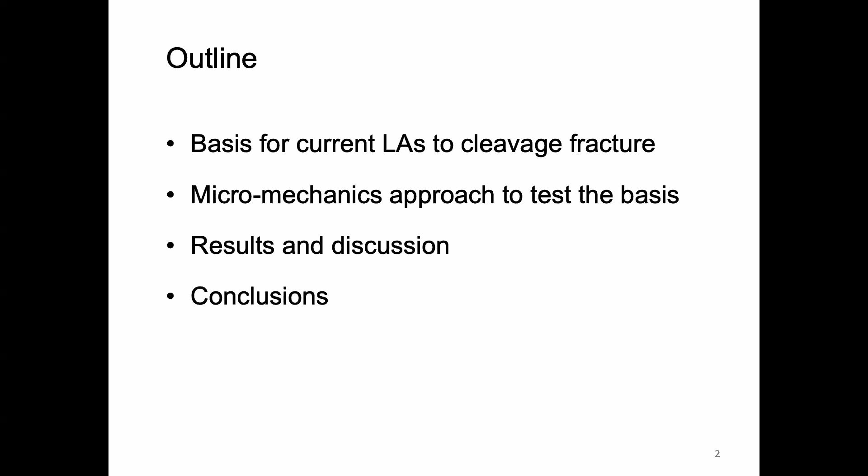The conventional local approaches for cleavage fracture start with the assumption that cleavage fracture is a Poisson process, which means three things. First, the probability of failure of an elementary volume is proportional to the volume.

Second, the probability of more than one failure in one elementary volume is close to zero, taken to be zero, which is the weakest link assumption. Third, the failure events in these disjoint volumes are statistically independent.

When you take these three assumptions of the Poisson process, you build all the local approaches to cleavage fracture.

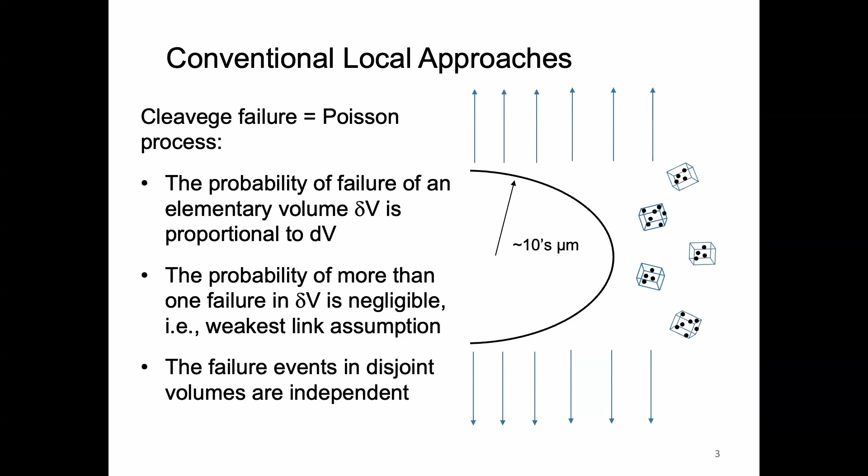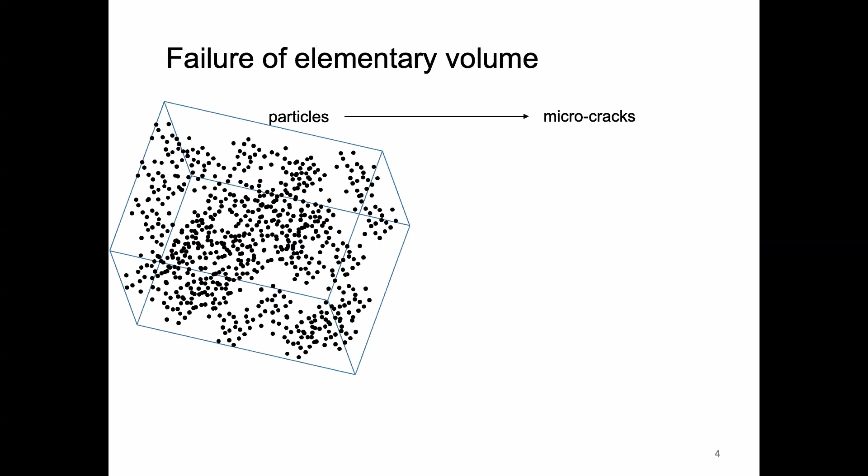From there, the logic continues like that. You have second phase particles, which are initiators for damage, and some of them, not all, form microcracks. Then the local approaches say the microcrack density curve is something we don't know.

We do know the density of particles that can be measured experimentally, but we don't know the microcrack density. Therefore, we assume it looks like a power law, and then the shape of that power law is calibrated with experiments.

But when you calibrate at one temperature and one constraint condition, and you want to move to another to predict probability of failure at another temperature, another constraint condition, or irradiated condition, you fail.

So essentially, this is the distribution of microcrack density, and there is a critical microcrack size. If there is a critical microcrack in your structure, then it can propagate.

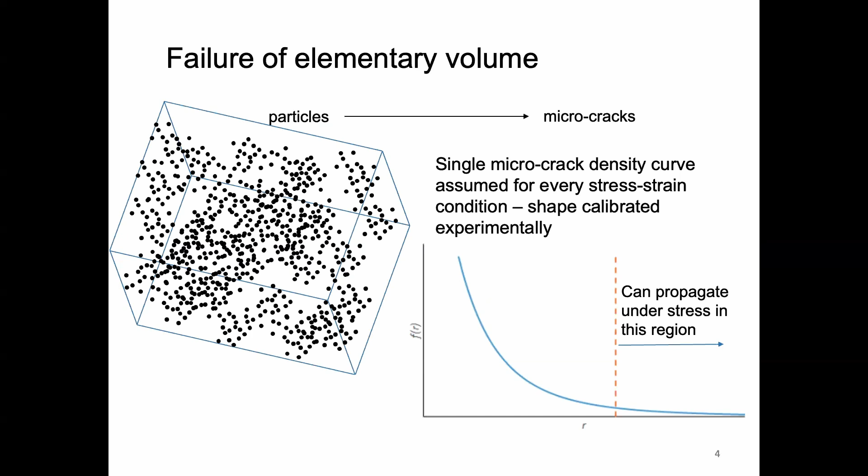That is the challenge, and it has been the challenge all along, although there have been a lot of trials to fix the problem. Eventually, when you calibrate at one temperature and constraint condition, you cannot, in most cases, provide accurate prediction at another temperature, constraint condition, or irradiation condition.

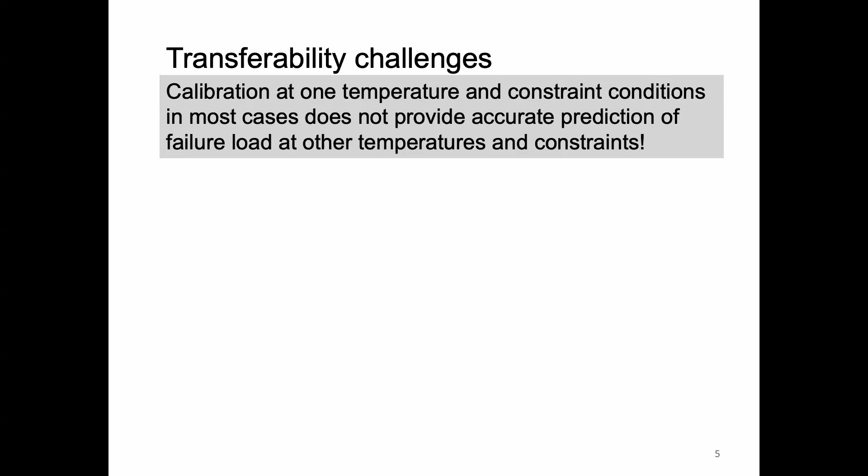In a way, if you know how the deformation properties change, you would like to be able to put it in the model and predict how the fracture toughness properties would change. But that's exactly what is not possible.

What we want to develop is a faithful model that accounts for the fact that the model capturing particle failure should be able to decide whether this failure leads to microcrack formation or void formation.

This is particularly relevant to the ductile to brittle transition regime. It should be able to somehow say what is the size of the defect resulting from this particle failure.

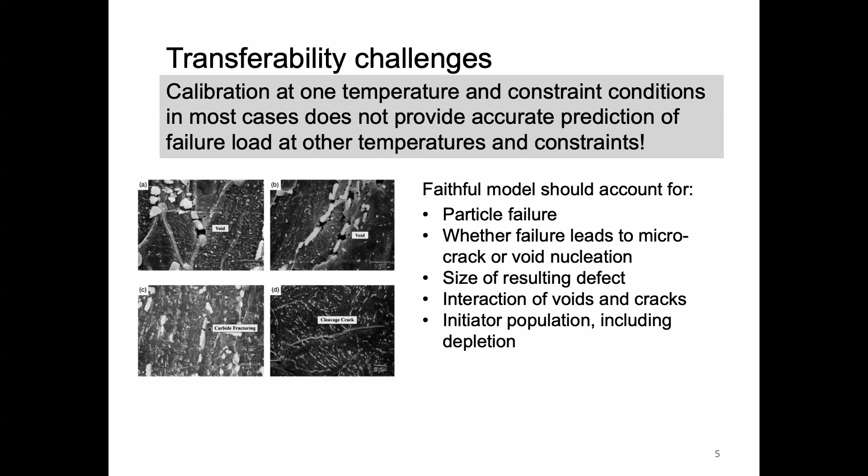It should be able to account for interaction of voids and cracks, and also for the population of initiators, which is a measurable property by metallography, including the fact that there may be depletion of these particles with the load. It should also say what is the critical microcrack size for propagation.

The problem we think exists with the existing local approaches is that all these different factors, although some are taken in different models, vary differently with stress strain conditions. That means in different locations ahead of the crack, different factors may have different contributions.

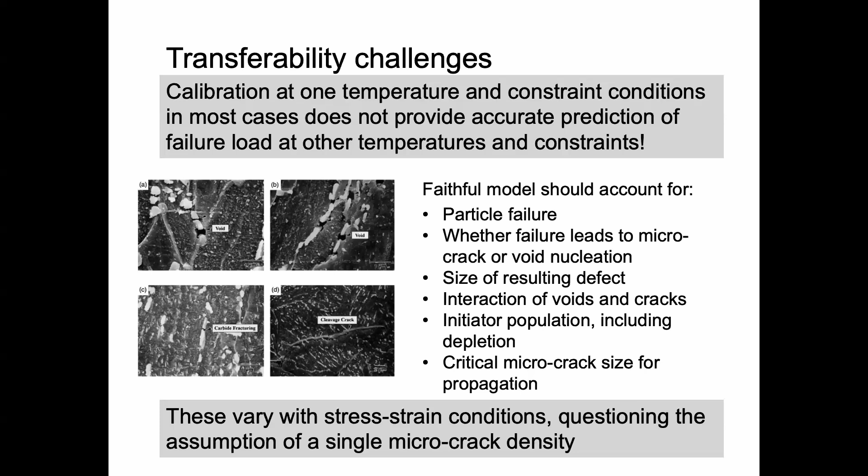That is questioning the assumption that we have a single microcrack density curve and the entire basis for, for example, the Beremin model.

So what Mike took to do was to create a micromechanics approach where he models the particle failure by deciding whether it's going to be decohesion, using a sort of Gurson model, or whether it's going to rupture and form a microcrack.

For that he uses a model that the three authors on the first page published in 2014, so it's been 10 years now. Then he wants to be able to follow the competition of ductile damage with cleavage.

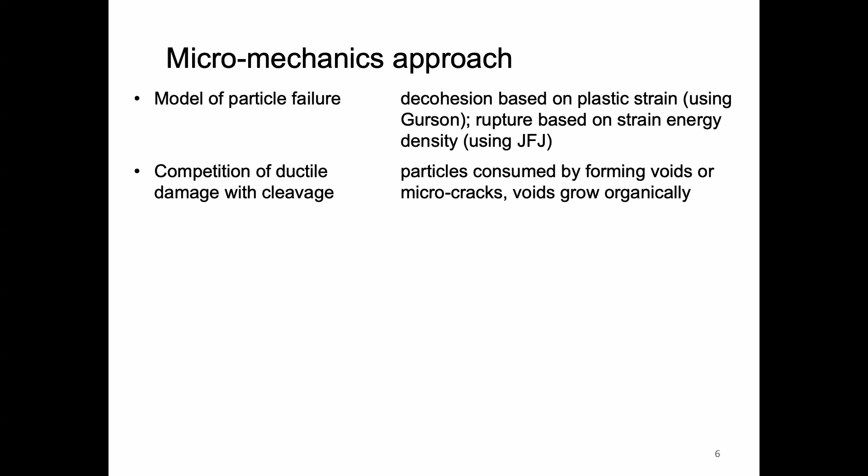So particles will be consumed by forming voids or microcracks. Also to predict mechanistically the defect size.

To account for interaction between local damage between the defects, so that load is distributed into the region surrounding the defects that form, and the coalescence of defects.

Eventually he wants to be able to consider macro crack effects, so he uses the model at each integration point separately, and then scales up to representative volumes.

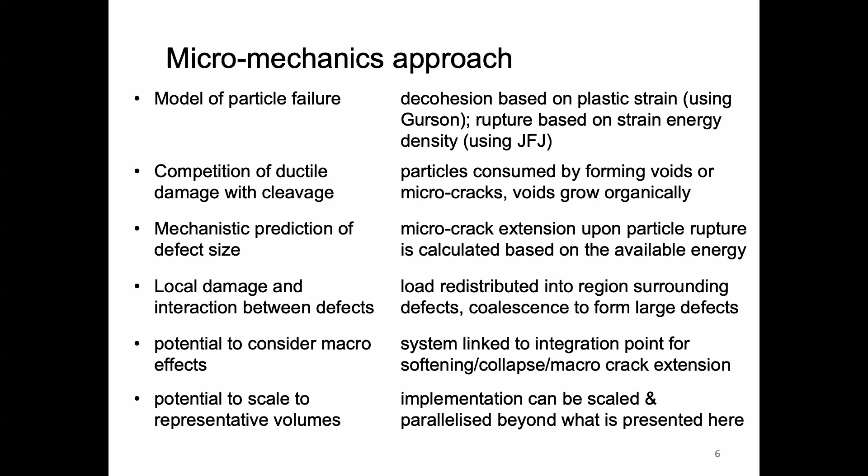I'm going to show only two simple things out of this, because it's a long story and you'll probably be able to read the details. But the load redistribution he handles in this way.

If you have a void that forms, the excess stress at the void end is redistributed linearly to a certain distance that depends on the void size—this is the horizon. If there is a defect within the horizon, that particle sees increasing load. And if there is another defect already formed in the horizon, there can be coalescence if the condition for coalescence is met. Here's an example of how it works.

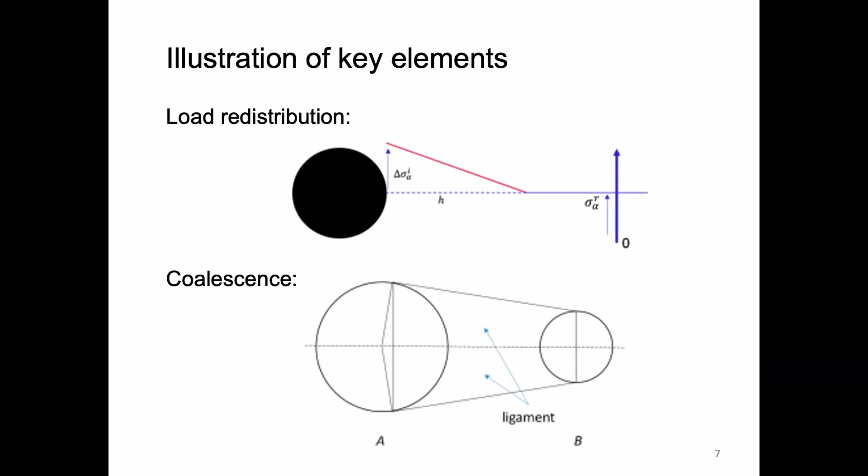This is one picture that is followed, at an integration point ahead of a crack in a 3-point bend specimen. This is the load here, the stress intensity factor that is increasing. These are the increments in the solution: number of voids, number of microcracks, aggregate voids formed by coalescence, aggregate microcracks, and so forth. The simulation starts with a random distribution of particles.

We have 10,000 particles initially. A very small number of those are already voids, because you can see that in the real material too, so there's a certain number of voids initially. These 10,000 particles are distributed along grain boundaries, triple lines, and inside the grains. What you see here is only the ones distributed on grain boundaries and triple lines—the underlying microstructure isn't shown because it would be too difficult to explain. In the beginning you have these voids, and this is the picture of everything: the voids and the remaining particles on grain boundaries.

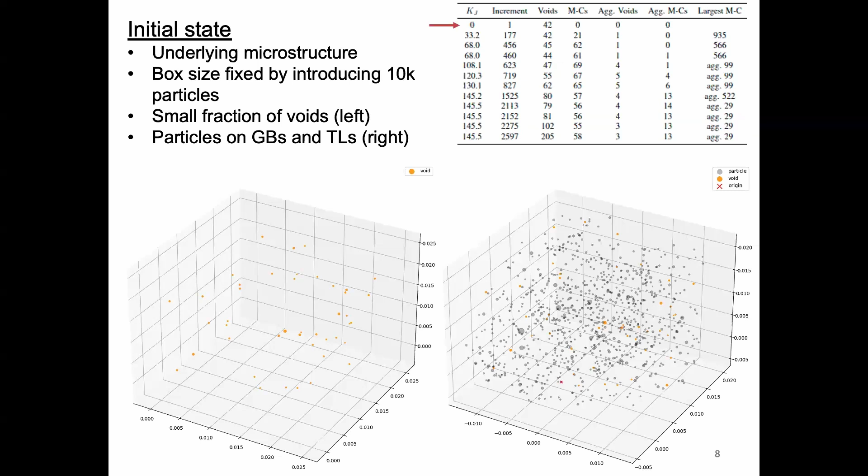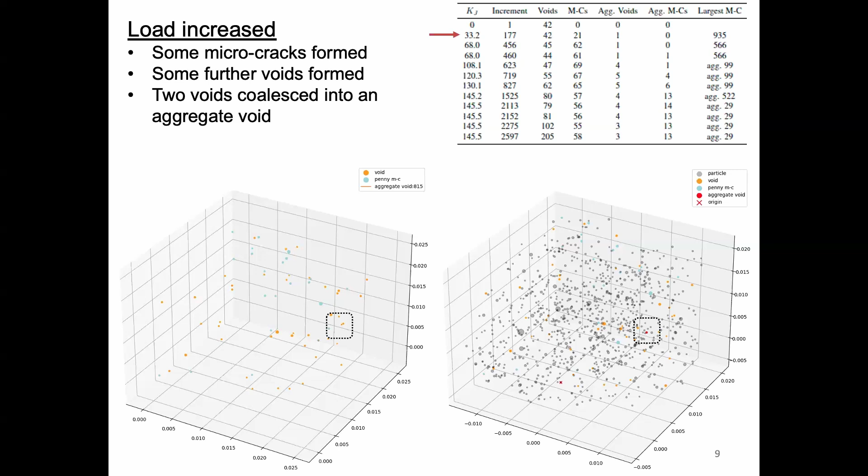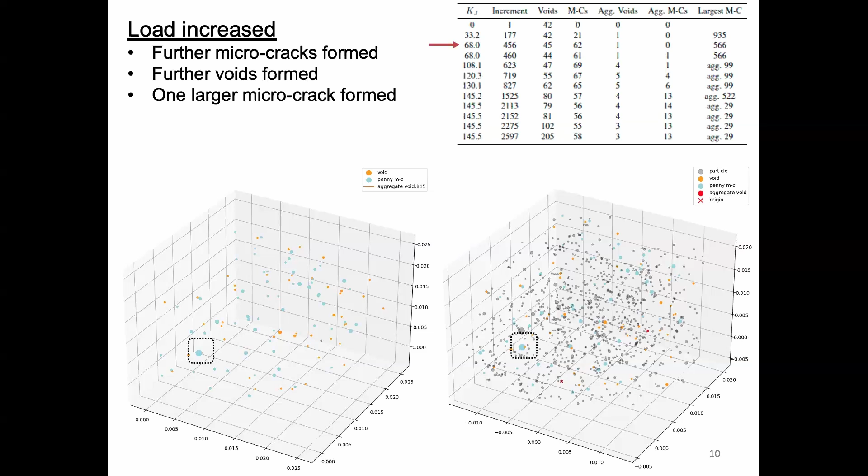As you start increasing the load, you see the first penny-shaped cracks forming—these are the blue dots. Some voids are increasing, and then the first aggregate of two voids forms. Increasing the load further, you see larger microcracks forming or extending, including a large one over here. At the same load, in the next simulation step, this microcrack consumes a neighboring void—you can see this from the reduction of voids—and becomes a larger microcrack. This continues.

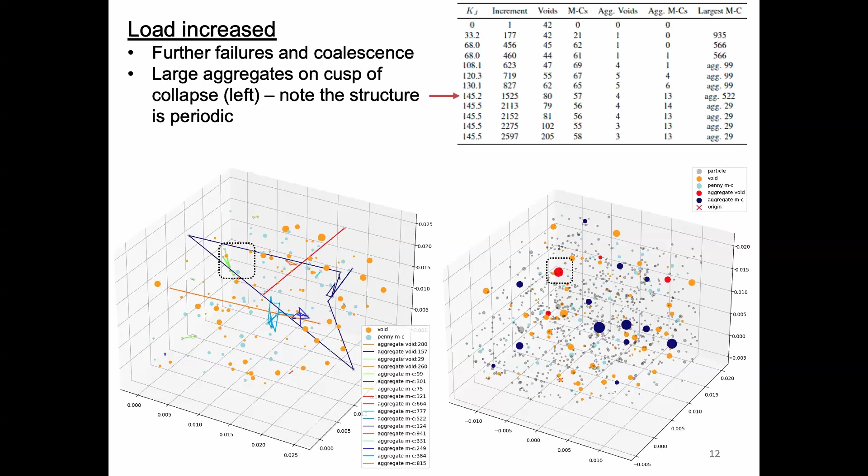These lines here show large defects. They appear as lines because this is a periodic structure, so this point is actually very close to this point on the other side—it's a little confusing. Now we're at a load almost at the collapse load, just below it. You have very large aggregates on the cusp of collapsing, and just a small increase of the load leads to collapse—that is the microcrack forming the collapse.

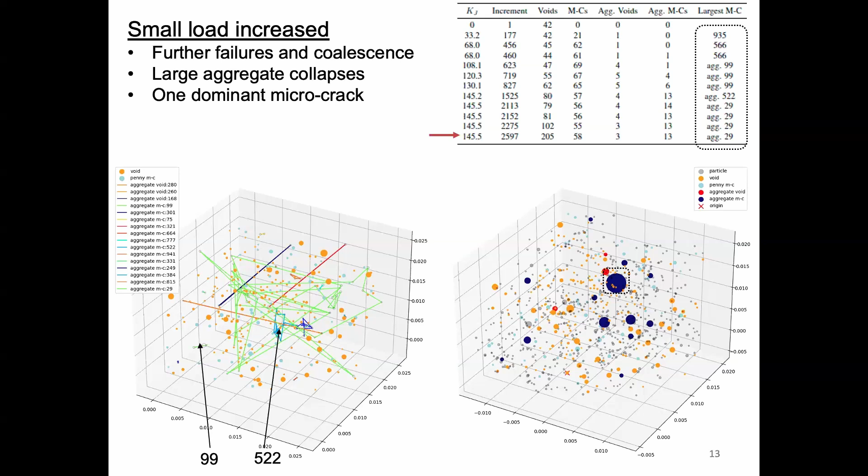You can see that the largest microcrack actually changes with the increase of load. In the beginning, these were the largest microcracks, but eventually it was the 29th particle, for example, that failed. So what we did next is take this model and use it for all positions.

First of all, this was one realization. We did 100 realizations, and the results here are the average of those—100 realizations, 100 distributions of particles. This is the distribution of microcrack density ahead of the crack, perpendicular to the crack plane, and along the crack line.

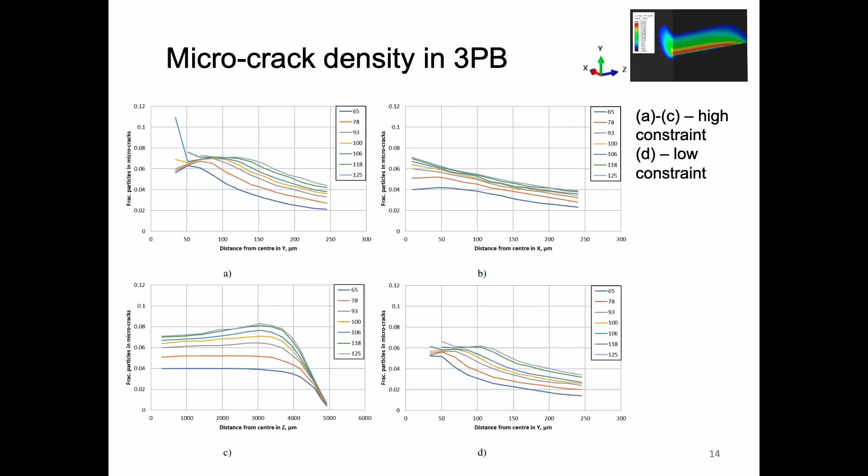In a high constraint geometry, and this is ahead of the crack in a low constraint geometry, you can see that microcrack density varies with stress-strain conditions. This contradicts existing local approaches, where this distribution is assumed constant—you're assuming the microcrack distribution is exactly the same everywhere. That's one of the problems. There are models where the microcrack distribution is controlled by plastic strain, but it falls off like the plastic strain distribution, meaning the peak is at zero and infinite in an elastic-plastic material. So this is one thing we found with the model.

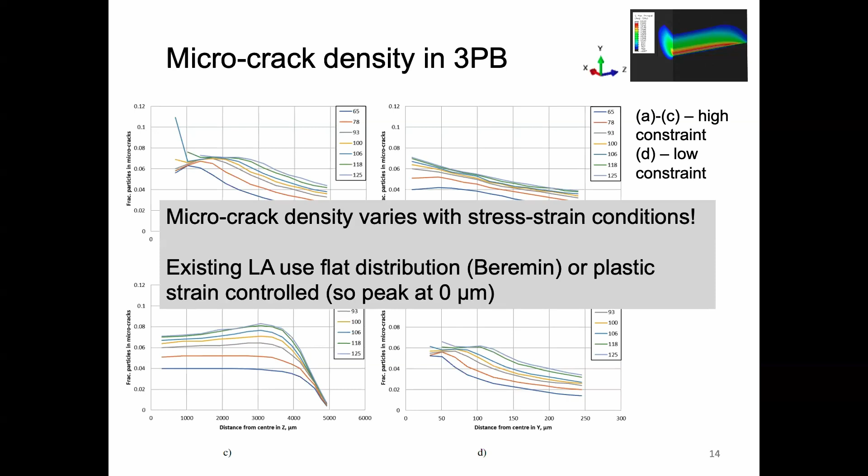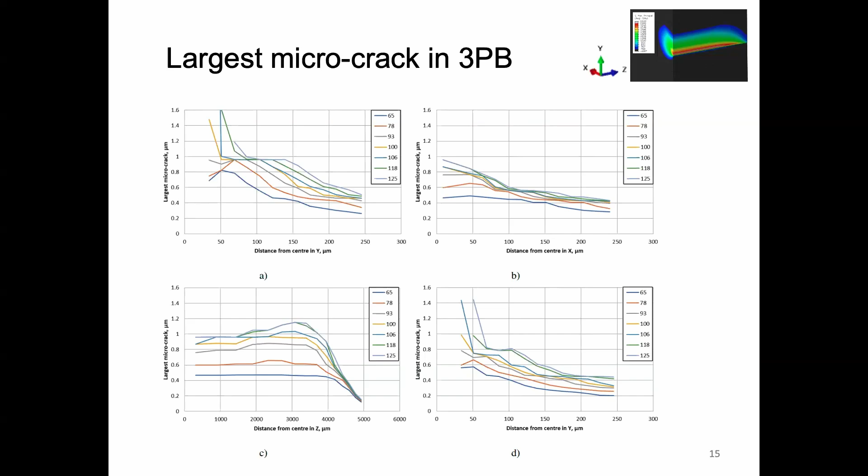The second thing is the largest microcracks. The largest microcrack also varies ahead of the crack, normal to the crack plane and along the crack line, and it varies quite differently in the low constraint geometry. So the takeaway is that the way plasticity develops has a very strong effect on where you find, or the probability of finding, a microcrack capable of propagation.

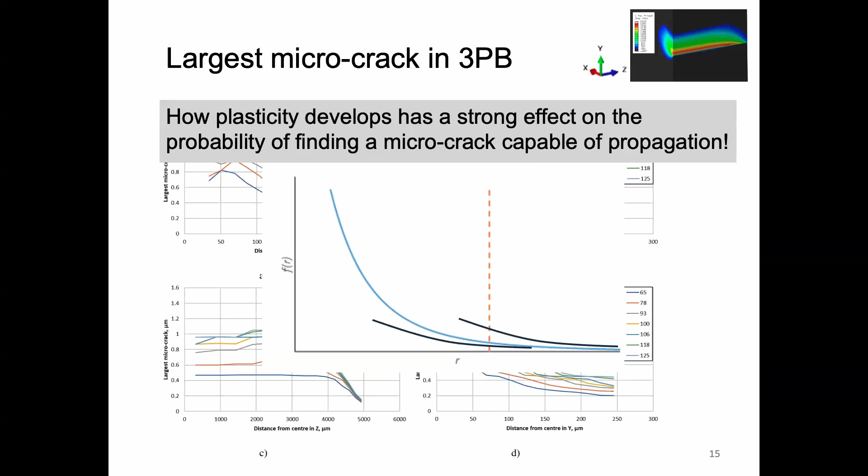That means if you assume a single curve, at some point the curve may look like that, and at another point it may look different—it can change everywhere. When you do a single calibration, you may be calibrating this curve, but in a different constraint condition or temperature condition, you need a different calibration. So the existing models as they are aren't transferable, and as I explained, the tail may vary significantly.

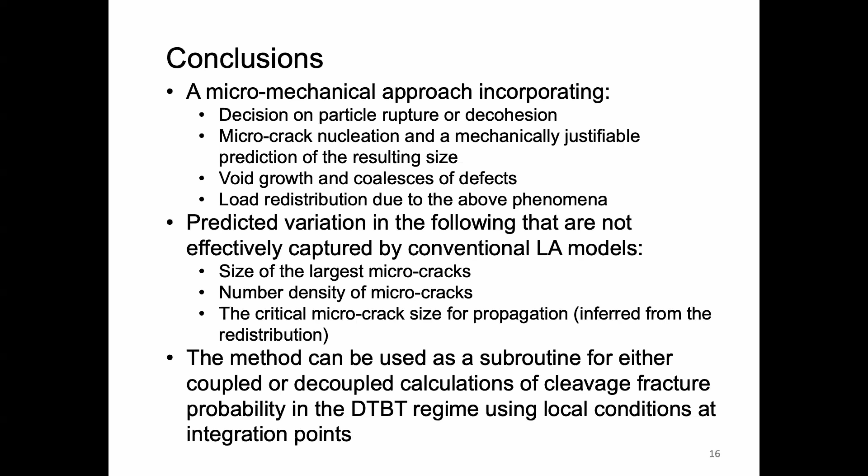To conclude, we have presented this micromechanical model, which can predict the size of the largest microcracks, the number density of microcracks, and the critical microcrack size for propagation. The idea is that it can be used as a subroutine for either coupled models similar to GTN or decoupled calculations of a probability of cleavage. Thank you very much.